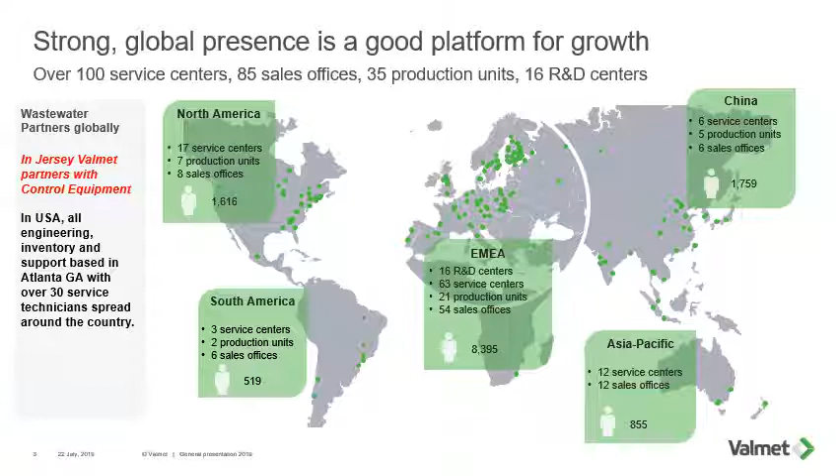In North America, we've got 17 service centers, 7 production units, and 8 sales offices for about 1,600 employees. Most of our support for automation is done in the Georgia area.

So what's Valmet's offering for wastewater management? What we're offering is advanced measurement technology and controls for municipal and industrial wastewater treatment through dry solids management. We have these tools available for users out there, operators, and they revolve around solids measurements online - that would be all over the sludge circuit, from primary clarifiers all the way to cake measurements.

Again, online measurements. And we kind of close the loop with specialized samplers that allow the customer or the user to take safe, accurate, repeatable manual samples in the field, and close the loop with advanced control packages using solids, online solids measurement - continuous online.

So what we're trying to do is challenge the way to optimize processes. There's still a lot of processes in the wastewater treatment industry that rely on a single point measurement. That means a snapshot in time - a lab measurement. Based on the lab measurement, we take a grab sample. Based on the result, we take a certain action.

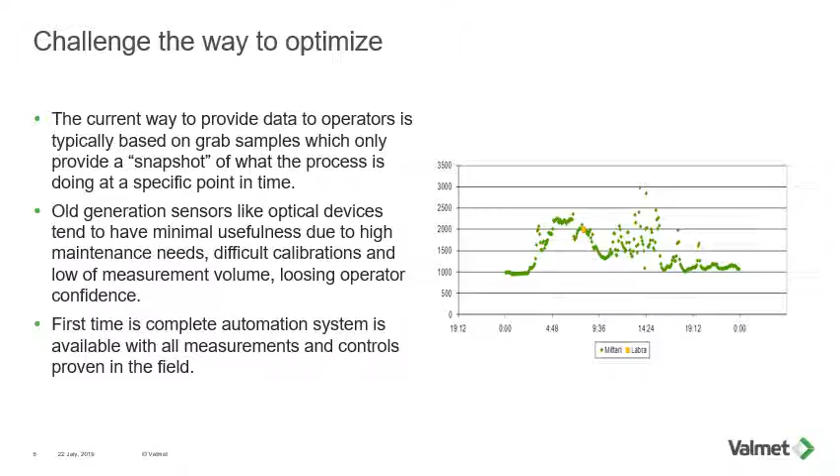Unfortunately, that point in time does not always tell the whole story. There's a lot of variability that the operators are missing by using this type of practice. So by going online, you can get a lot more information and take more intelligent control actions.

So with what we have, the Sludge Dewatering Optimizer - we call it our acronym, the SDO - and associated online measurements, with these combinations, we can more effectively control the process through the plant.

So we have proven technology, been in the field for quite a few years measuring solids. We have all the centrifuge solids measurements covered from front to back. We have over 40 years experience in solids measurements in different industries, and those would be pulp and paper, mining, and wastewater treatment.

And we have reliable real-time results with these online measurements. We close the loop with this Valmet Sludge Dewatering Optimizer, and basically this optimizer is multivariable controls. It's based on reliable hardware that's in use worldwide, and we custom develop applications for customers and their process.

And with this type of technology, the customer or the user has 24/7 basically optimization with the real-time measurements.

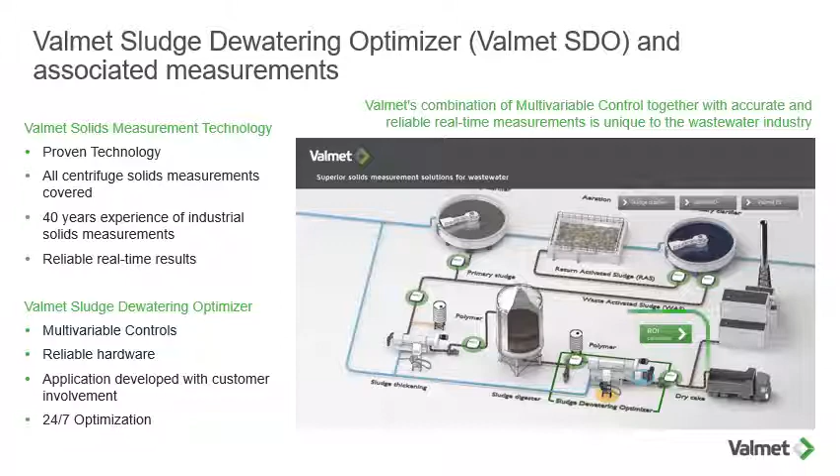So if we look, for example, this is how we would equip a centrifuge. We have the inlet solids measurement capability, we have the cake measurement capability, centrate, and then we close the loop with the SDO.

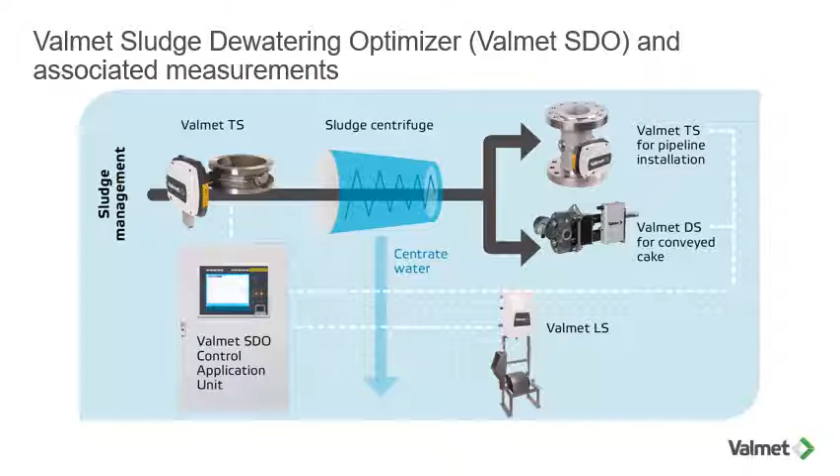So the TS measurement can be used either on the front end or the back end, measuring the cake online, whether it's pumped on the cake side, and of course on the front end it's pumped. This type of equipment could measure total solids ranging from about 0 to 40% solids. It's a real-time measurement, and it has a very, very wide application range. It doesn't care whether you're pushing primary or secondary sludge through it, or what the sludge composition is.

There's no moving parts, and it is completely solid state type technology. So there's minimal maintenance involved in this type of measurement.

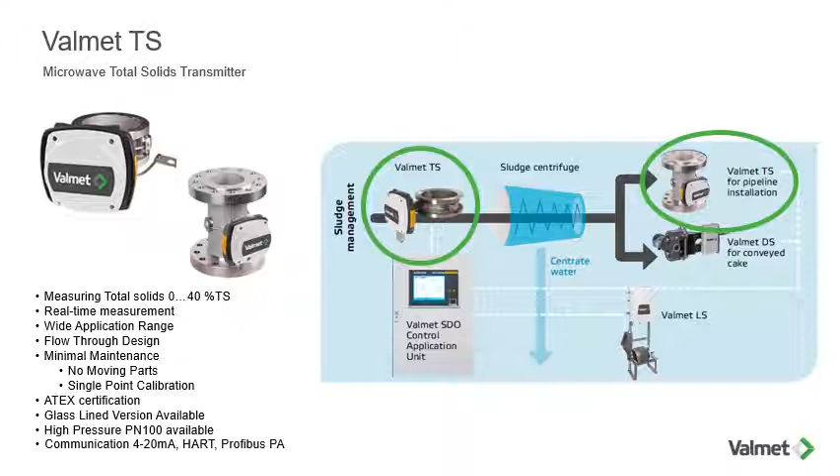We have a specialized centrate measurement that provides continuous feedback on how the centrifuge is operating.

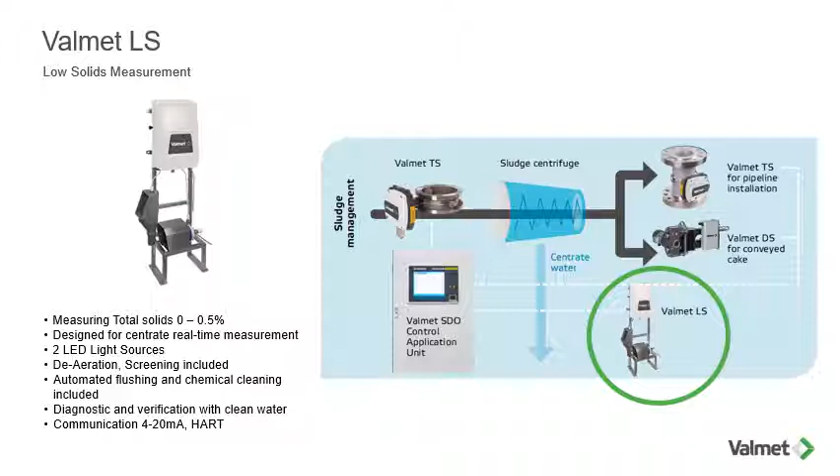And in recent years, we've developed an online dry solids measurement that gives us the measurement of solids, cake solids coming out of a centrifuge or any type of dewatering equipment if it's free falling. So if it's being conveyed, we can actually grab it, convey it through the instrument in a continuous fashion, and give a continuous output of what the cake solids is.

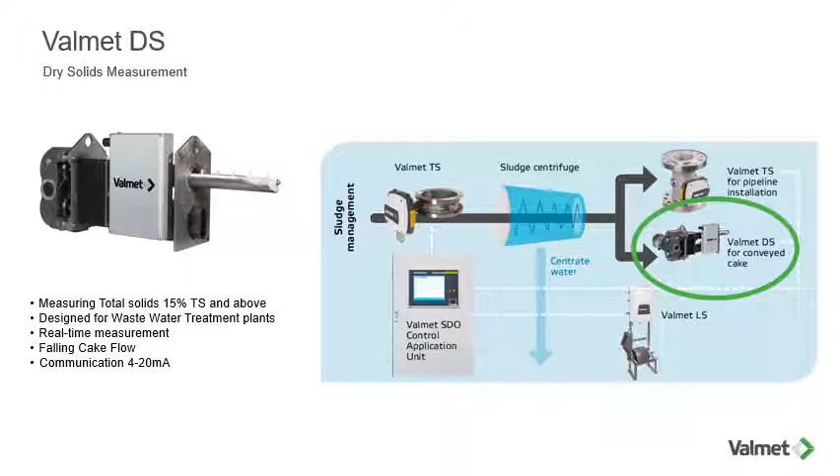When we look at, for example, a centrifuge operation, a lot of the parameters or control variables are interactive. So if you're moving polymer around, if you're moving torque around, it has an impact on more than one variable. That's why we use MPC control in the SDO.

So it's multivariable predictive control. We build models on how the process is behaving, and we will predict what the reaction will be to a certain change in the process.

So if we get a change in sludge flow, and at the same time there's a change in polymer addition, or we make a polymer addition change, we will predict what that will be coming out of the centrifuge, or what the impact will be on the centrate. And we take actions based on those predictions, and they're self-correcting because of all the online measurements that we have that are continuous.

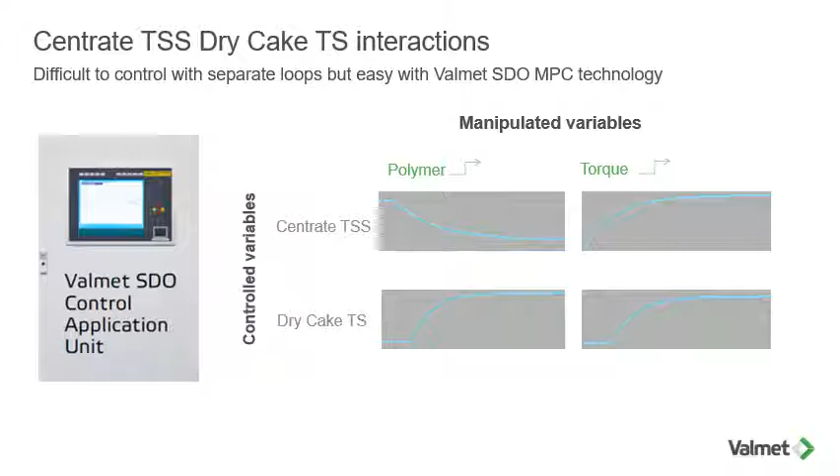And our structure is modular. So just to give you an idea, this would be like a first step structure. So we have the sludge dewatering optimizer.

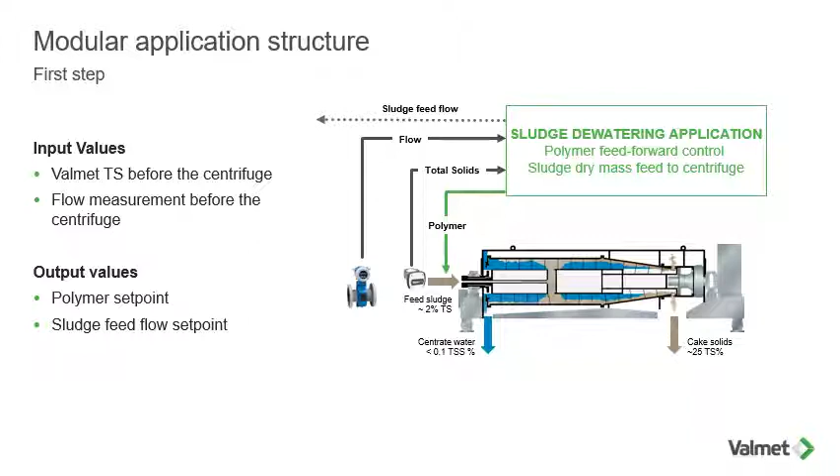Typically, input values we're looking at is Valmet TS before the centrifuge, so that's solids measurement being continuously measured, and the flow measurement going to the centrifuge. The control output values are typically polymer set point and sludge feed flow. So that's just based on input values of the sludge going to the centrifuge.

We could add a second variable on that, which would be centrate solids, for example. So this is another input value which would further give us insight into polymer set point and sludge feed flow set points.

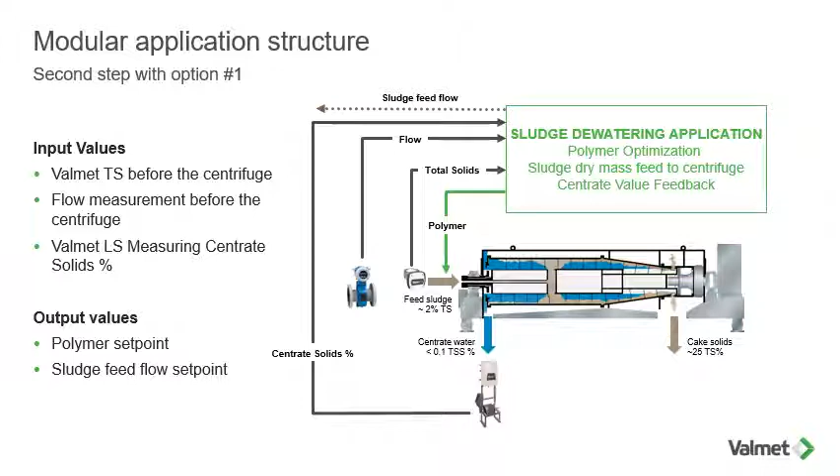Let's call this maybe option 2 of the second modular approach, where we could add dry cake solids, continuous measurement of dry cake solids. Then we have output values we can interact with the torque set point by having this value coming back in a continuous fashion.

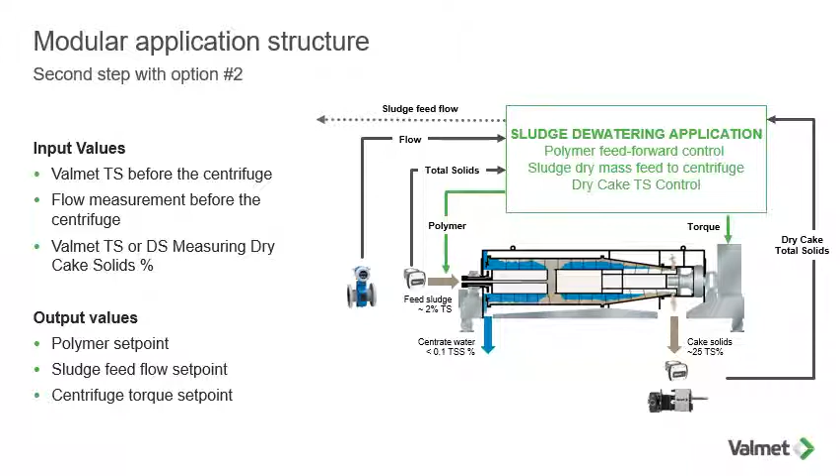And if we looked at an all-dressed situation, we would have input flow, flow and solids, centrate, and cake solids being fed into the sludge dewatering application. These are all the input values which we typically look at, and output values which we manipulate through the control system.

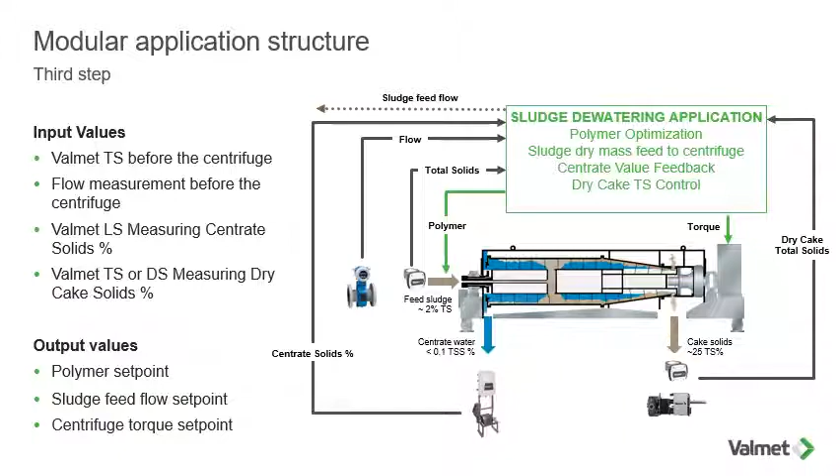So if we look at the modular approach and performance, if we're working normally off of just manual control or manual interaction with continuous measurements as a baseline, what we've seen with the plants we've worked at is that just by adding that first step, control based on feed solids and feed flow—going from adding polymers based on flow to kilograms per ton or grams per ton—we've typically seen savings around 20%. So that's a pretty good step.

If we add dry cake control and centrate to that, we can definitely jump into the 40-50% range. And if we add the full SDO package, we get quite a big jump in benefits right there.

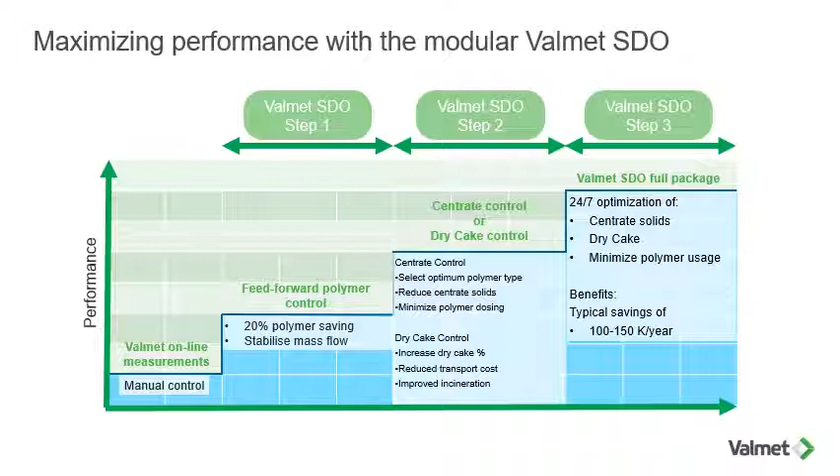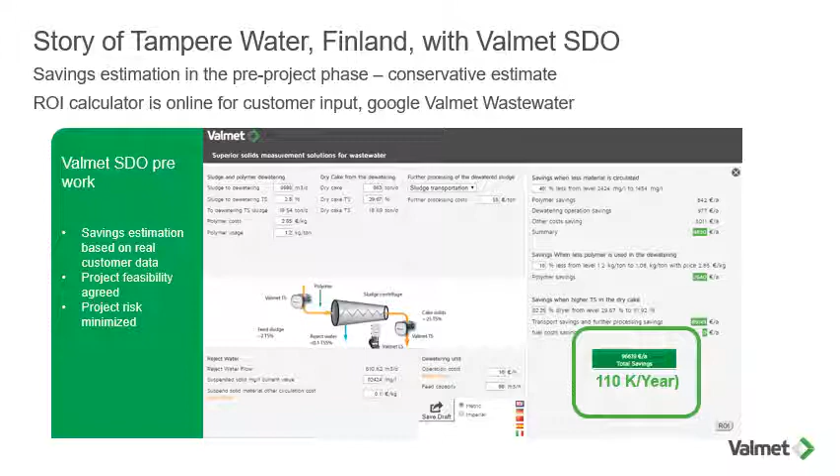So one of our customers, a more recent case, we did an early estimate with them. It's a European case, and in their case, we projected they would save about $110,000 per year, just on one centrifuge. The year of operation, they were able to save just short of $160,000 US.

And the savings was in returned centrate solids, polymer consumption, and also the bump in solids in their cake allowed them to save money in transport for landfill.

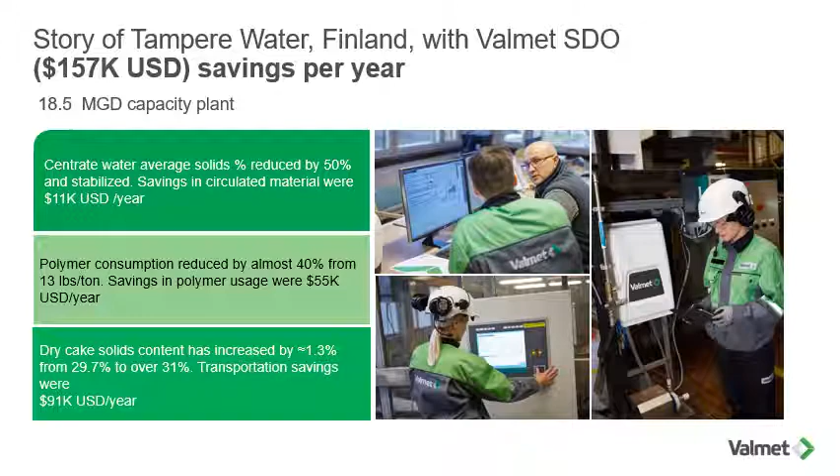And I believe my time's up. Any questions?

Is there an element of your programming logic that takes into account the efficiency of the motor of the dewatering equipment, accounting for that in savings? Like, I might up the torque and improve my solids, but now I'm running higher in the curve and not running my motor as efficiently. Is that part of the logic?

We could, if you have an amperage measurement and we can measure it, we can put that in the model. Was it part of the study calculation? That I don't know. I doubt it.

Is there a way to measure the polymer in the centrate? Like when you're overdosing, polymer escapes into the... I'm not aware of an online sensor that can actually measure residual polymer.

We don't manufacture one, but if there was one on the market, we could include that in. With our SDO, we have a lot of IOs, and every case is a little different. I'm giving typical ins and outputs. With one SDO, we could easily control up to 4 centrifuges. But we have a lot of IOs available to take in more information.